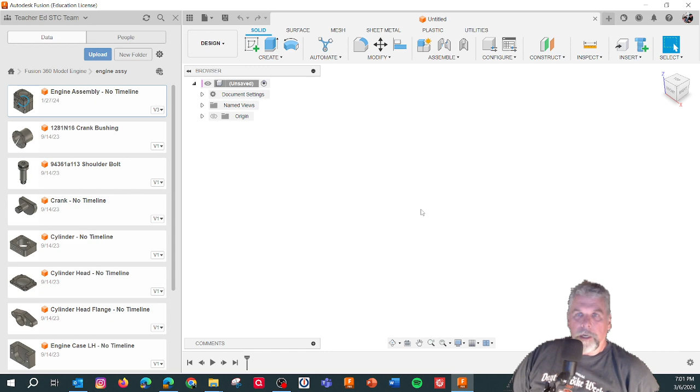And I think this makes more sense as components of an assembly right here, because these are actually called components now. They're not individual parts.

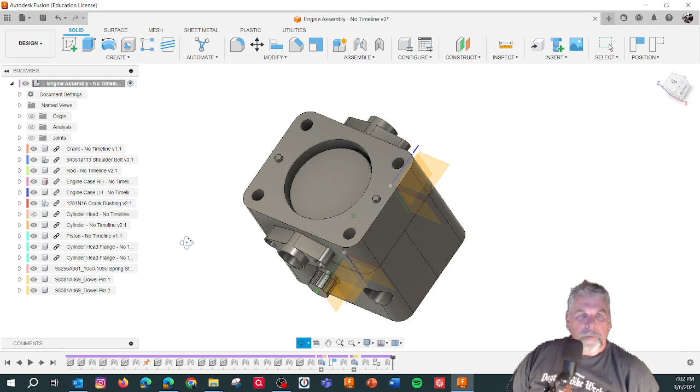So I would like to make some of these so you can visually see what's on the inside. So you got, let's take away the cylinder head. You got a piston on the inside. Let's take away the cylinder.

That's called a piston, and these are flanges. I'm going to take one flange, two flanges away. There's a couple of dowel pins there. Dowel pin, dowel pin. All right.

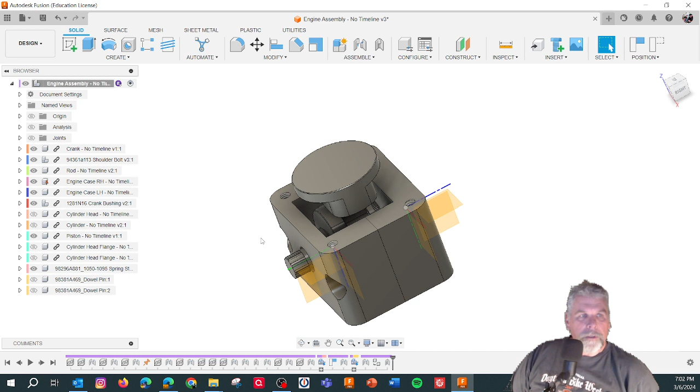So now we have a piston, and these are called cases. Let's take the cases away. And there we are, the cases are gone.

And this one we call a crankshaft, it says crank right here. And a shoulder bolt, which will be the bottom of the connecting rod. And the connecting rod is connected to the piston, and it has a pin up here.

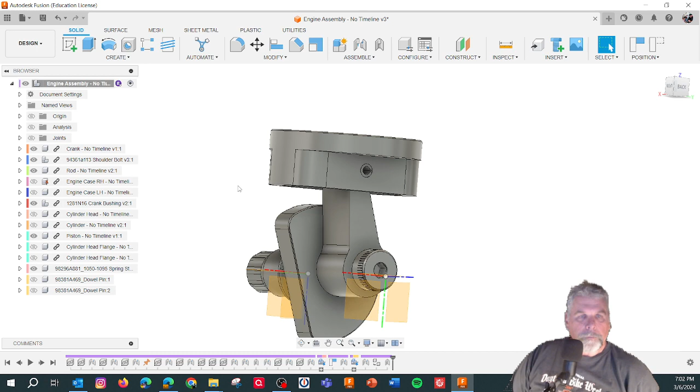So we want to be able to show you, if you make all these components, you'll have a little mechanical engine. I think there's a couple of parts you do need to buy, like this shoulder bolt, this bushing here, and we actually made some more updates to it.

And if you go on Mechanical Advantage with Kevin Ellison, let me see if I can find his. Let me pause for a second. Where's my pause button? It's here somewhere. I can't see it right now. All right, let me switch to my Chrome.

Let me look for the Mechanical Advantage website. There we go. All right, I'm going to bring that over here. Mechanical Advantage right here, I am subscribed to the website.

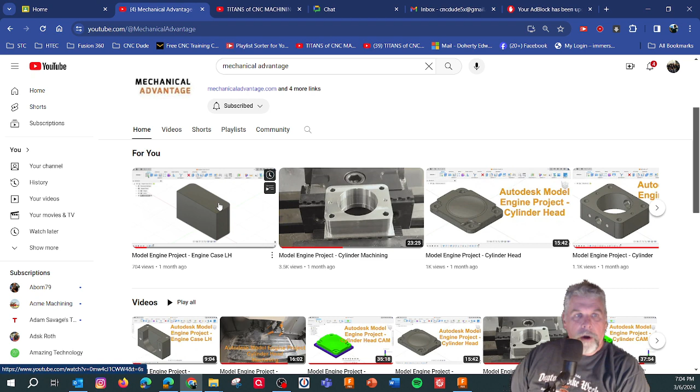And right there, he's got the Autodesk Engine Project Series, and he's making it on his CNC machine. So he's walking you through the steps. We got engine case left hand, cylinder machining, cylinder head, cylinder. Let's move to the right. Different things you need to consider when you're making these.

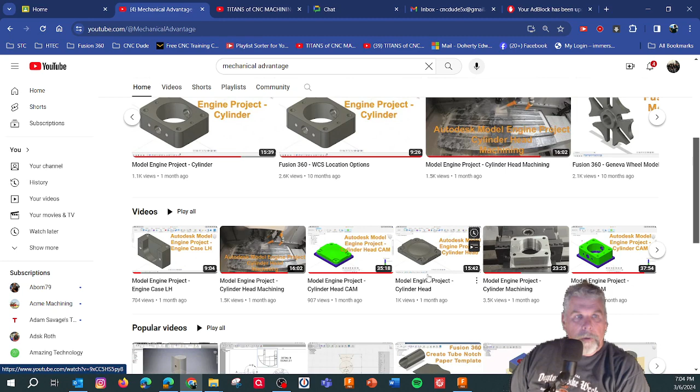So he's in the middle of this series right now. But if you take this all together, in our class we are making it, and we're going to assemble them. So going back to the Fusion here.

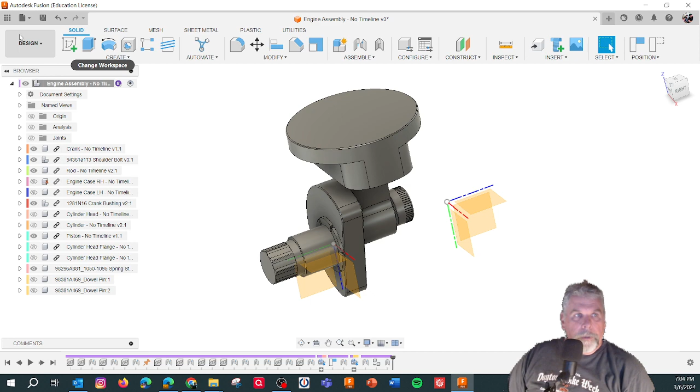We went to this area. These are all the individual components up and down here. So when you go into that, let's see, Fusion engine. This was an updated engine we made.

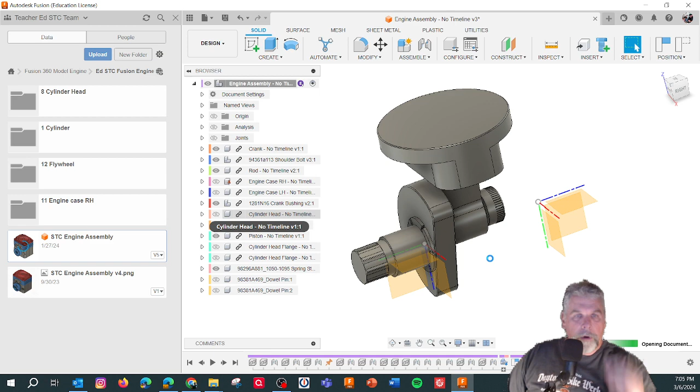And I think I'm going to also show everybody how to make this outside pulley so you can turn this, and we put some fins on the cylinder for cooling, and we added a spark plug hole. And maybe some way, and maybe kind of a snazzier case here. But it's a pretty good assembly.

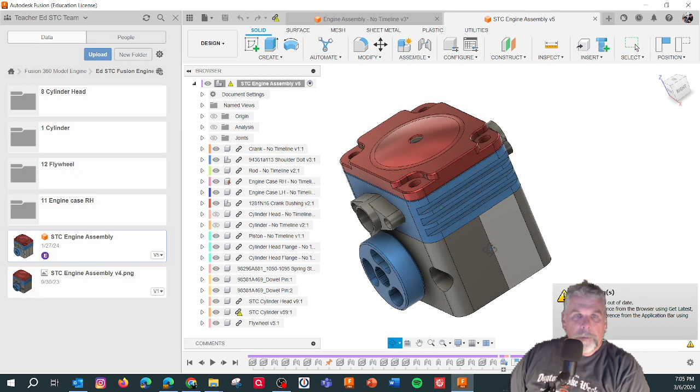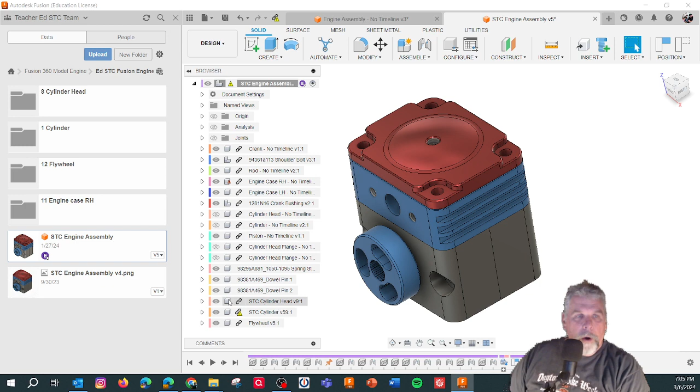You can make one project, should take 11 parts, and break it all down. So the same thing here, we got cylinder head. Where's the cylinder head? Oh, that's the flange, flange. Oh, STC cylinder head. All right, yeah, we changed it.

So the old cylinder head here, new cylinder head with spark plug hole. Old cylinder. No, our cylinder head, cylinder. Originals, and cylinder with fins.

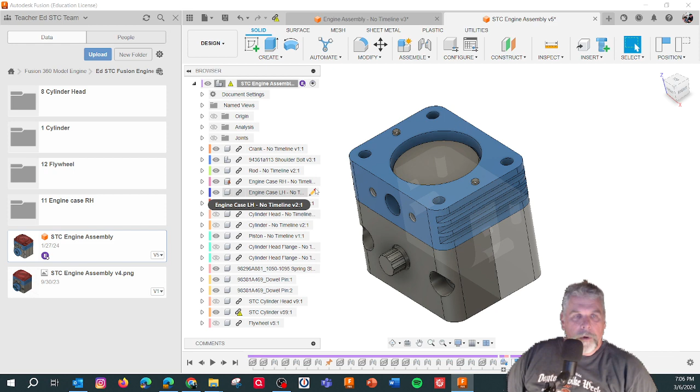Then we added a flywheel right here, flywheel which goes on this. So we're all going to get out there and show you how to make this engine assembly, piece by piece, and learn Fusion at the same time.

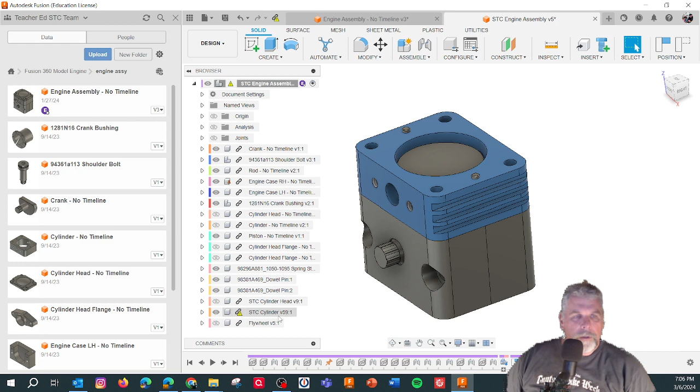I think when I put this on, I can actually have the engine assembly. Where is the assembly here? Right here, assembly, engine, no timeline. So let's go back into Fusion itself. These are all individual parts. I don't know.

It says teaching supplements. Look, we got instructor guide and other model engine projects. Let's look at that.

Let me let it update. I don't see any links there. Let me go back, I thought I had a link. Instructor guide. Oh, it's right up there. I'll look at that later.

Want to create a custom playlist to share with your students? Okay good, so that's what we'll probably do. We got 3, 4, 2. They're not in order, but let's go to the right here. We get 5, 9, 7, 6, 11, 10. Does that all add up?

We got, which one are we doing here? Cylinder. All right, let's say cylinders. Cylinders number 1. 3 is engine rod soft jaw. 2 is engine rod. 4 is crank soft jaw. 5 is crank.

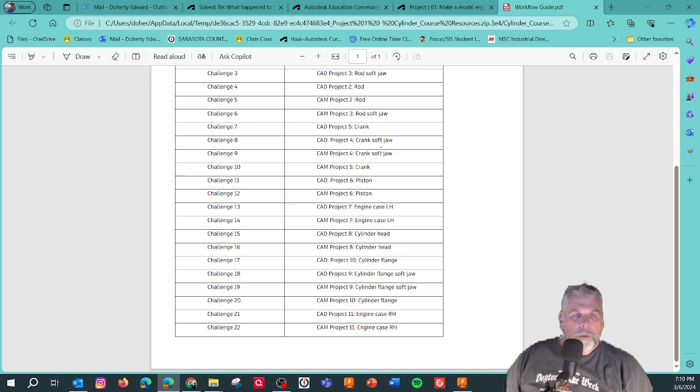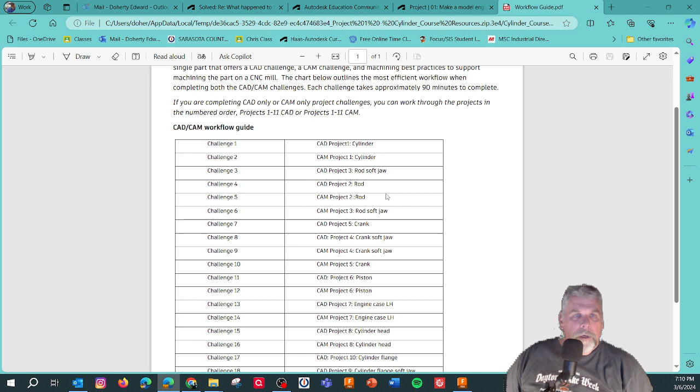Ooh, it's got 22 challenges. We got cylinder, soft jaw, rod, crank. Okay, we can work our way through that.

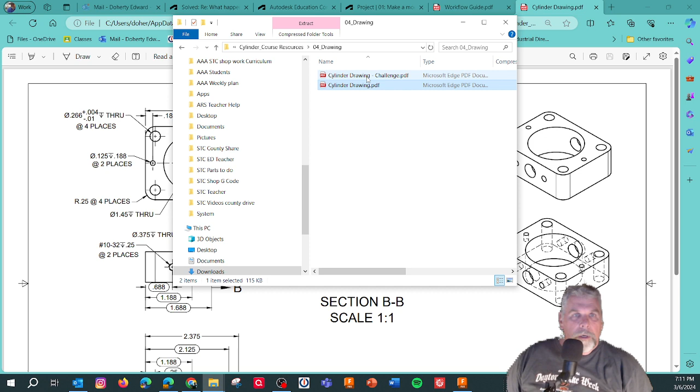Drawings, let's go cylinder drawing. Yep, we can make a model from that. I think I saw another one here that said cylinder drawing challenge. I'm not sure what's different about that one. I like ours with the fins in it.

Data set. CAD, no data set required. In other words, you got to draw it. So, oh, there's cylinders right there. There's your cylinder. And engine assembly. Okay, you got enough to get started.

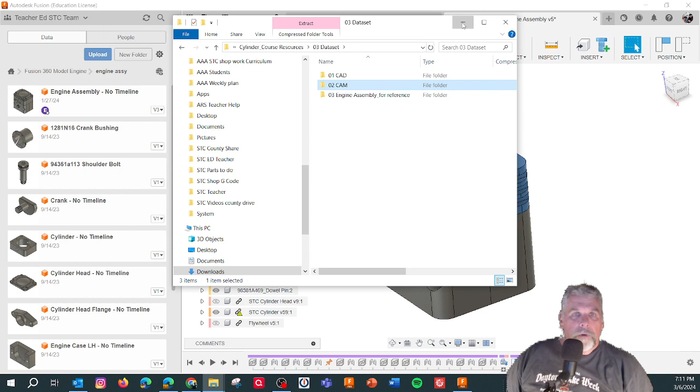So you really need to follow the course. So if you go into, you can follow Kevin's course here. Or what do we have in the Fusion side here? Project 1, cylinder, challenge exercise. There's your cylinder, review blueprint.

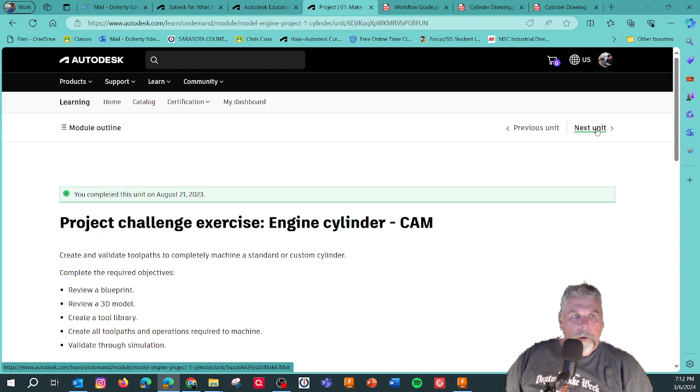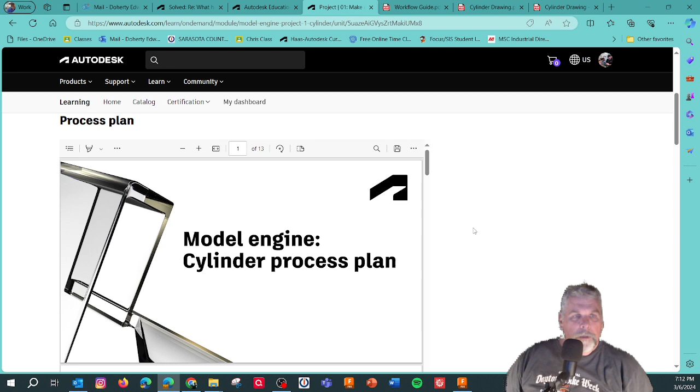All right, let's go to next unit. Process plan, it's not a video, you got to read. What are you making? Go back. Machining best practices, so a lot of PDFs. There's a setup sheet there.

Okay, I guess we'll have to walk you through this. We'll start doing lessons on how to do this project. We'll go step by step, inch by inch. And we'll get there. But in the meantime, I think it's a really great project to start with for learning this.

As I started to think about it, I think, unlike the other courses, it hasn't got a lot of the video content. It's really left up to you as a more experienced programmer at this point. Let's see what we get.

Project design, manufacturing. It looks like Autodesk has intermingled everything in there. Let's see, software, Fusion, FeatureCAM, Fusion.

Okay, well anyway, we directed you to how to get all the projects and the assembly. And I think it would be helpful to have some content on the manufacturing end.

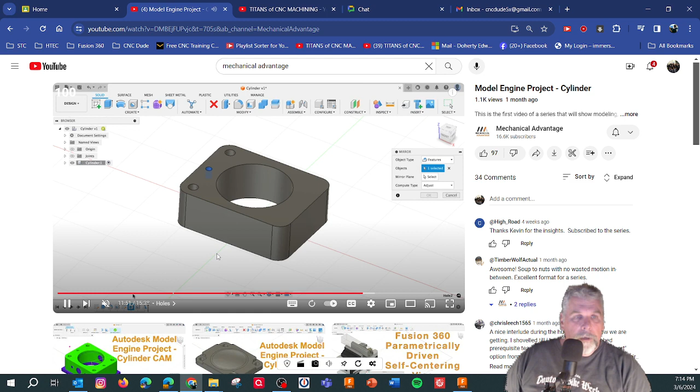So you don't have to take the model, you can make your own. Then we get cylinder head, so he's also getting into design.

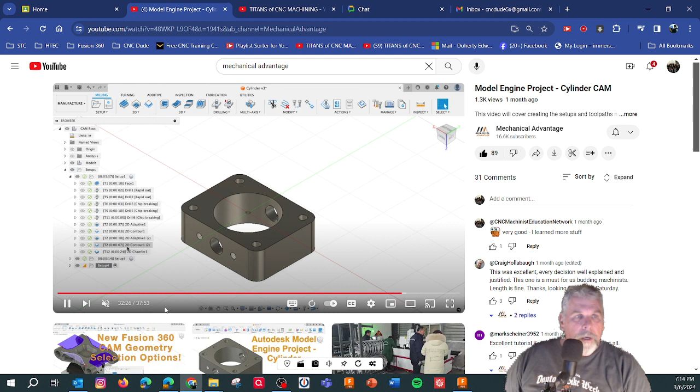And let's see, we got modeling and the CAM section right now. CAM in Fusion is called manufacturing, but CAM is computer-aided manufacturing, and how to do the machining part. So good, I'll leave that up to Kevin to keep on trucking along on this series. But it's an excellent series.

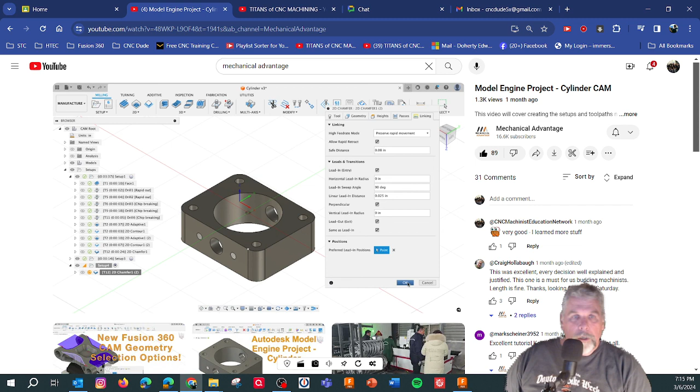We're using it in our school as a production environment. We're going to make 25 engines, which means we have to make 25 of each component. We're going to be running it as CNC operators and taking turns and make sure we measure everything, because if you get some of these numbers wrong, they won't assemble.